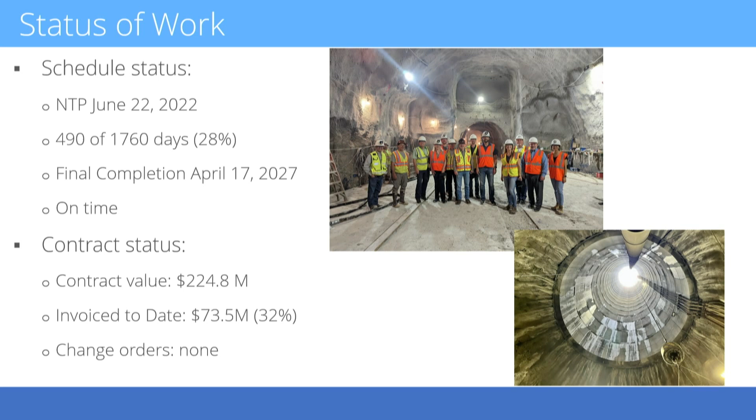On a cost basis, the original contract value was just under $225 million, and invoiced to date, and this is from a period back, is about $73.5 million, or 32% complete, and happy to report also that there are no change orders on the project.

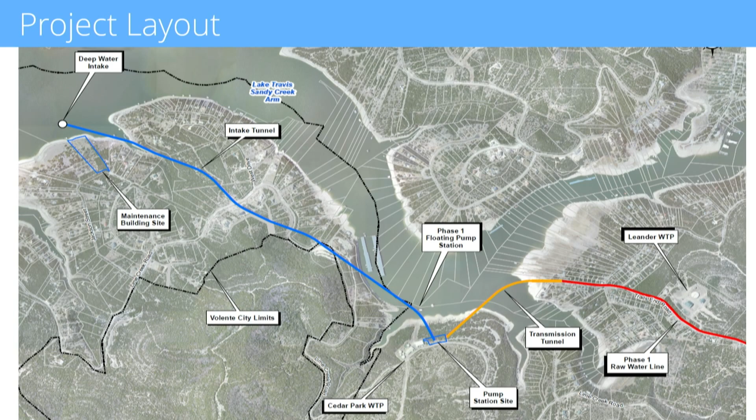So what I want to do now is give you an update, and I'm going to update you based on work site. And so we've got a work location at the pump station next to Cedar Park plant. We've got another major work site at the end of Trails End Road, where the transmission tunnel connects to the Phase 1 pipeline. And then we've got a work site over at the maintenance building in the intake. So let's start by looking at the pump station site.

I also wanted to report that the contractor did have a lost time incident on construction of the transmission tunnel about a month ago, and so the contractor has been working hard to reinforce the importance of safety with their crews and their miners underground.

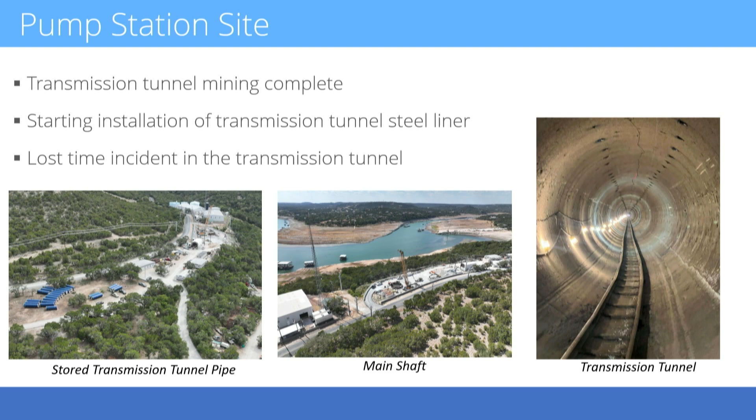Staying at the pump station site, when they flipped the tunnel boring machine around, they started working on the intake tunnel. So that heads the other direction out towards the two lake taps that we have for our intake system. And they've been mining at this point on average, and keep in mind they do two-shift work, so they're working the majority of a 24-hour period. But they've been achieving about 200 feet per day with that tunnel boring machine, which is a tremendous amount of mining in a 24-hour period.

And you guys probably recall, we talked about the quality of this limestone rock. It's excellent for tunneling, and they've been able to achieve some really great production on those tunnels. And that's why the project is ahead of schedule at this point, because the critical path does go through the tunneling, and the tunneling is ahead of schedule. They anticipate that the TBM will arrive at the intakes in early November. So next month, within a matter of a few weeks, they will have completed that 9,000-foot tunnel out underneath the lake.

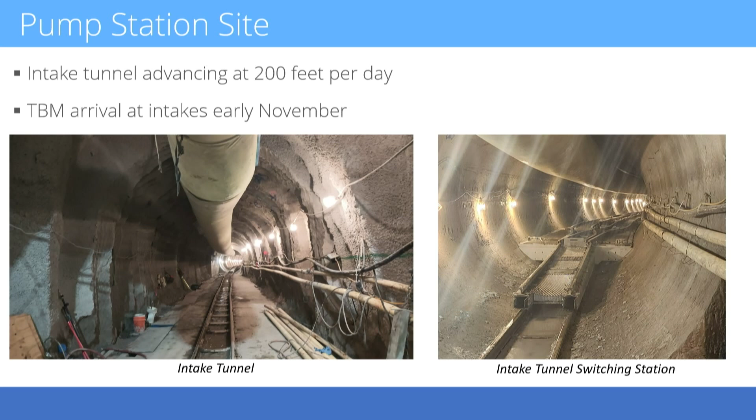So let's jump across the lake to Trails End Road. This is still a very active construction site. They had previously completed the shaft at Trails End Road and grouted in place the riser pipe vertically in that shaft. And now the contractor is working on preparing for the open cut construction in Trails End Road right-of-way to connect the pipeline coming out of the tunnel to the existing Phase 1 line that is already located in Trails End Road. In anticipation of that work, they're putting in some temporary storm piping and working on relocating some of the pavement when they open cut the road.

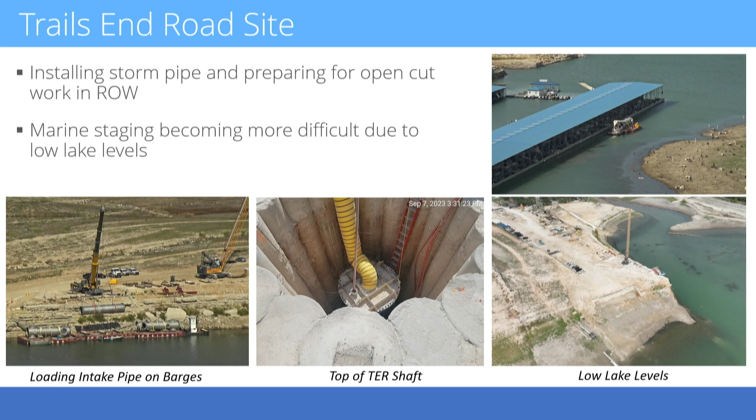They were able to complete that grouting from the maintenance building on shore there in the village of Volente, which was something that we had previously negotiated with Volente was an activity that would not be done at that location, but the contractor approached Volente and Volente agreed to allow them to do that. So that was very helpful for completion of this portion of the project.

Currently, they're getting ready to attach the remaining intake sections. So there's a grouted portion in the lake bed, and then they will attach the upper section that's in the water column that the screens will ultimately be attached to for the complete intake system. The screens aren't going to be installed at this time. They'll come back in the future and get those installed. But here by the end of the year, the intake system, less the screens, should be completed.

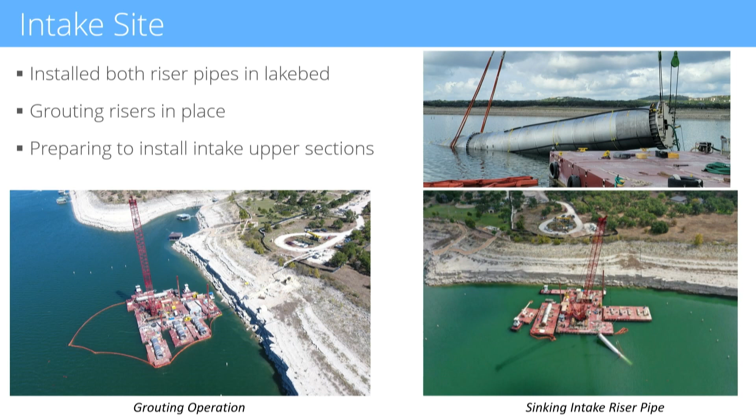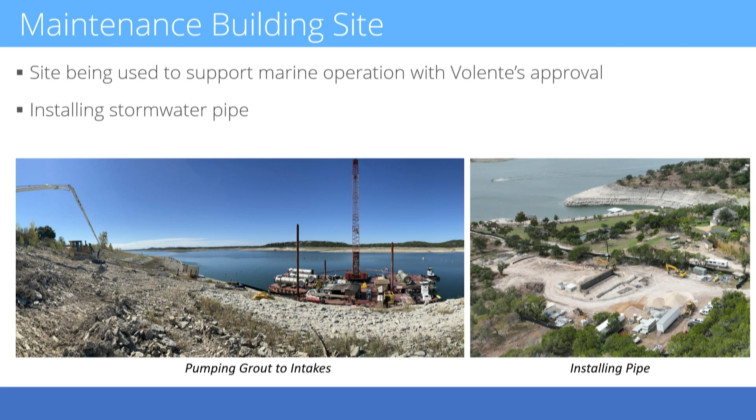And then on the adjacent maintenance building site, in addition to using that to facilitate construction of the intakes, they're continuing to do some site work on that site with some large diameter and deep buried stormwater pipe before they move back to working on the maintenance building.

So looking forward, a few things I wanted to highlight. First, of course, we've got our November 15th site visit that I hope everybody can attend. We'll have an opportunity at the pump station to go down the 300-foot main shaft and go into some of the underground works at that location. And so that'll be a very good trip, and rain or shine, it really doesn't matter because you're far underground at that point anyways.

6 months forward, we anticipate they will have completed mining of the intake tunnel. They will have completed the installation of the liner system, the steel pipe for the transmission tunnel. The intake riser pipes will also be done, and they'll move over to starting to install the individual pump shafts at the pump station site that pumps will eventually be suspended in. So that's another shaft drilling operation. And the contractor will continue to work on the maintenance building.

On a cost basis, looking at the contractor's schedule, we anticipate in the neighborhood of about $51 million of cost incurred over the next year, which cumulatively would take the project up to about $125 million.

And I also wanted to report that we've made some progress with PEC on the permanent power agreement, which contemplates the final section of power improvements needed to bring power to the pump station site. It'll take power from the Nameless substation, which will be upgraded, and then it's about 4 or 5 miles of overhead lines to go connect into the temporary power project that was previously completed over at Trails End Road. So we're working with PEC on that agreement.

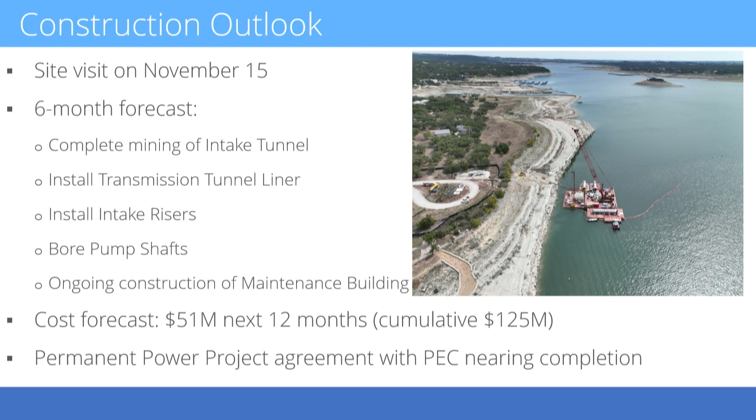And on the land acquisition side, we're down to 3 final easements for that property. And those 3 easements are on the southern route that we had talked about quite some time ago that connects that route from the intersection of Nameless Road and 1431 over to North Rim Drive. So we've been working with those property owners to finalize that alignment, and we're currently starting negotiations for that property acquisition, which will complete property acquisition for the project, which I think has been ongoing since about 2018. So it's been a long road.

So if there's any questions, I'd be happy to answer them. Good information. Thank you. Any questions? I had one for you, and if you can't answer, I understand for security reasons, but can you talk a little more about the lost time incident? Yeah, we have some reporting on that, but apparently one of the miners ended up in a pinch accident between some equipment, and so they did have to be transported to the hospital for care.

Okay. Thank you. Director Flores. So thank you for the update. Outside of securing the last 3 parcels of land, are there any other big unknowns or concerns about the project going forward? And then my second question is, any feedback from the local residents or neighborhoods about the project, and how's that being handled, or how's that going?

Yeah, land acquisition is always something that the schedule is a little bit hard to control. So I am anxious to get that process going so we can finalize those acquisitions. They're very large properties, unlike some of the small properties we dealt with on the rest of the project.

So that'll be a process. But I think we've got ample time to get that completed, get final design done and construction completed before we have startup activities beginning in 2026. Otherwise, right now, the contractor's been, I think, doing a good job in maintaining their schedule. We got the DRB set up, which we have talked about a few times in the past, and that's been kicked off. And so I think we're collaborating well with the contractor out there and staying in regular contact with them.